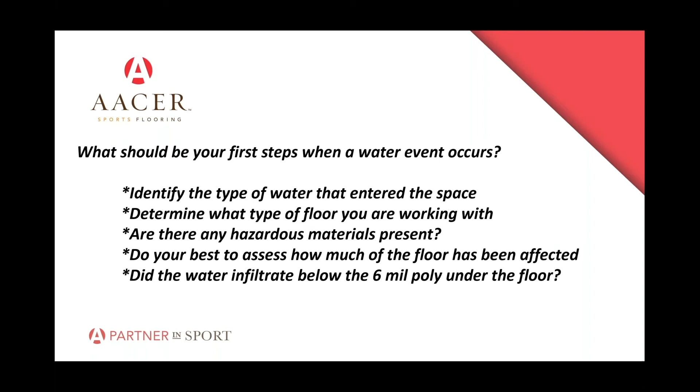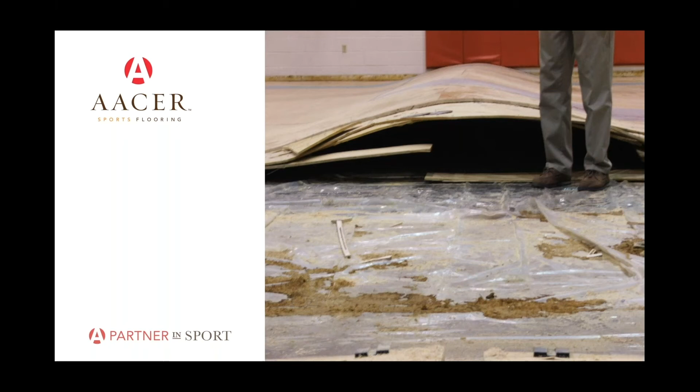Here's another example, and you can see what I was talking about earlier, where you have the visqueen and then the subfloor on top of it, this being a plywood subfloor. You can see it has really swelled and peaked, depending on the extent of how much of the gym was infiltrated. There's been a fair amount removed already. This is just another example of what you might see when you have a water event.

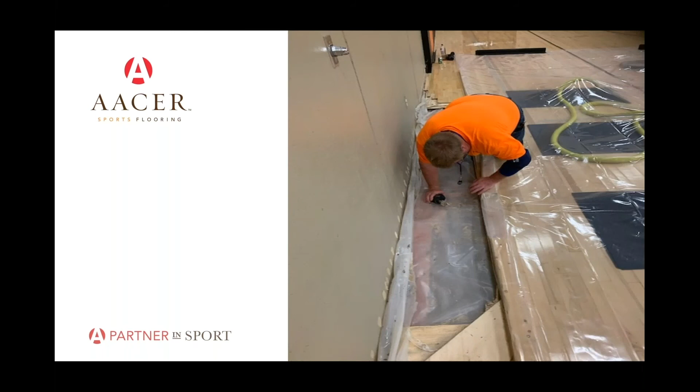As you'll see, or as we'll talk about, they just don't make a lot of this type of material anymore. So you want to get someone in. This is a good picture.

You want to get someone in to start doing an assessment of what's going on. In some cases, like right here, you'll see they've cut back from the wall, probably to relieve some pressure. I don't know if everyone understands this, but when maple expands, like in a minor water event, or even in a high humidity event, let's say your air conditioning system shuts down and it's a real hot, humid day or weekend, your wood is going to expand across the face width of the material more than it will expand across the length of the material.

So most boards are 2¼ inches face width, and as you'll see there, they have cut back from the wall probably about 18 inches. And to the right of the gentleman inspecting that floor, you will see they've already brought in some blower systems that they are looking to use to try to extract the water out from underneath the floor. So this would be a very typical example of a smaller, more manageable water event where we want to open the floor up, we want to get some air moving, and we want to get that moisture out from sitting on top of the visqueen. That's kind of what you're seeing right there.

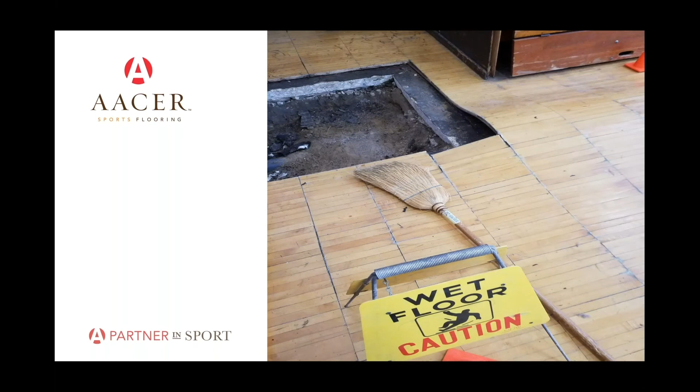The next picture is actually that little cutout we talked about when you're trying to determine what you're dealing with. There again are our short little boards we talked about two pictures ago. And as you can see, there's kind of a black mastic, so to speak, that's underneath that floor. When we talk about making sure you understand what is underneath the wood, that would be this situation where you want to know, you probably want to have it tested with your environmental people.

Maybe most of you have already removed these materials from campus, but these gym floors are old. We're going to talk about the history of gym floors, and really they go back into the 20s and the 30s. This type of system that we're looking at right here would be circa 1950s, 1960s, and we still see a lot of them, quite frankly. So they do still exist, and in most cases, you're going to have some type of an environmental assessment of what you've got going on there. So just wanted to show that.

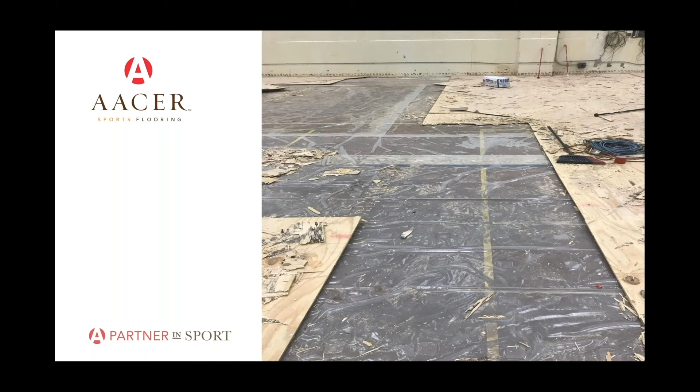So moving forward here, when I talked earlier about what's under a gym floor, I talked about how you always want to know what you're dealing with. You never want to blindly go into tearing a floor out until you know what is underneath it, so you can plan accordingly and be as educated as you possibly can as you go into the process.

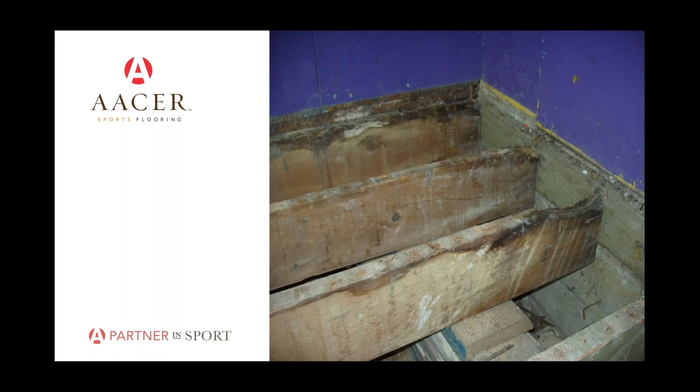So here's a perfect example of a floor that was built basically like a traditional house construction would be built, with large floor joists. There may even be some sort of a mechanical run or a mechanical chase that goes under that gym floor. We've seen that in the past. We've seen construction like this in certain geographies of the United States, and obviously this is a whole different ball game in terms of what you're coming back with. And just an example of why it's important to see what's underneath as you get into the process of what you're going to do coming back with repair/replacement.

And this is something that you should be aware of, using random length maple, it is more time consuming for sure. So it is going to cost a little bit more, but it's going to be a much better repair from a structural perspective, and a much better repair from an aesthetic perspective as well. If you do it this way, and then maybe you sand the whole floor and give it new paint, new seal, new finish, you might not even know that repair ever took place. So just wanted to kind of throw that in there.

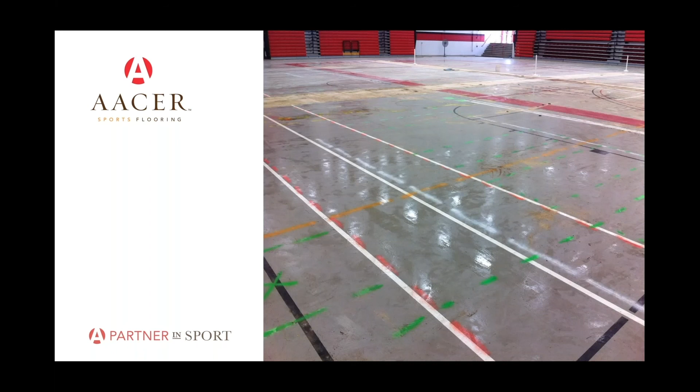These next pictures are from a project where they had an existing synthetic surface and wanted to do a modernization to the facility. And so they came in and they ran some new electric lines. You can see off in the distance, there's some plywood there. I'll give you a close-up of that. There's some plywood there where they ran some new electric lines and some new technology networking lines for scoreboards and such.

And then they filled that space, and then there was a wood floor that was built on top of the existing synthetic floor. And literally within a year of completing that brand new wood floor on the competition area, there was a construction project going on, like for a fitness center, and there was a storm, and a temporary door got knocked loose, and the floor flooded significantly.

So, one of the reasons why I put this out there is because we always want to be aware of if we're having any sort of growth or anything of that nature. And in this case, when we did tear the floor off, we did find that there were some issues with that existing plywood, again, that was only about a year old.

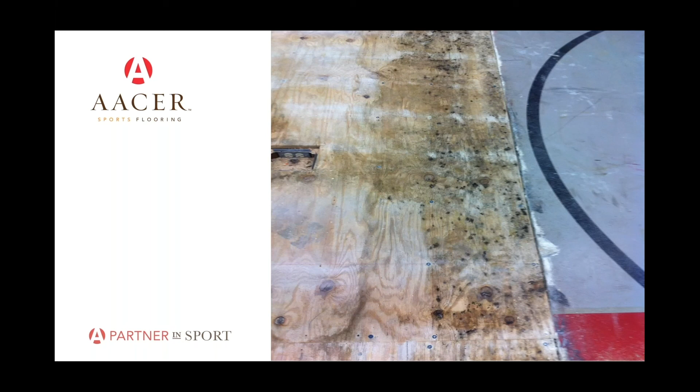So this started out where the original thought was that there was only a small area that was affected by the water infiltration. And I'm going to go back to the first, and as you can see, it was very wet when we got all of the material. So I talked about this earlier. You have to be careful where you think that the water is limited to a small area, because it can be very deceptive, and it's hard for anyone to know where it may or may not have migrated to.

But you always have to be aware of the fact that it can migrate once it gets under the floor, and it will do strange things. And in many cases, it's not as bad as it seems, and in other cases, it's worse than it seems, just depending on the details of the situation. So that kind of brings me through the water event in a facility, and hopefully that's been some good information.

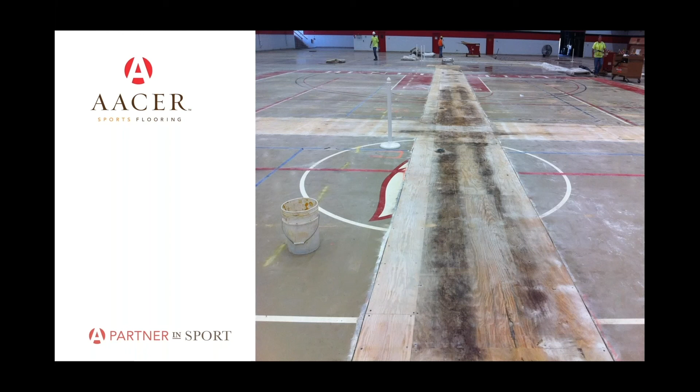And then I wanted to talk a little bit about the history of wood floor designs, because I think it's important. You've seen in these photos that I've presented about water damage, and water damage obviously occurs on old floors as well as new floors. But a lot of the pictures that you've seen would be what we would consider older floor designs. Not all of them, but a lot of them that you just saw, as we talked about with the short little 12-inch boards. That's an older wood floor design.

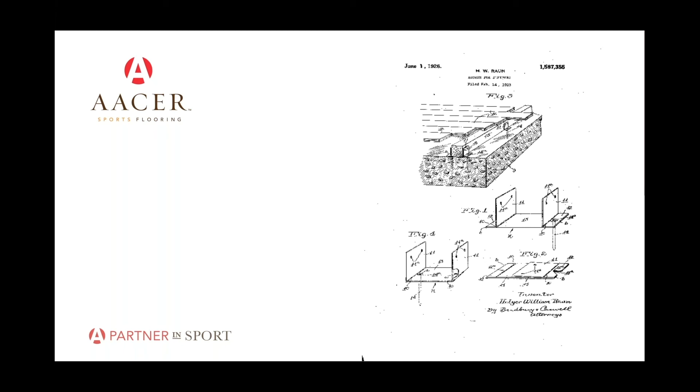This was kind of the first generation of trying to create some shock absorption and resiliency in a wood floor. And again, if we go back and look at this 1926 illustration, there's no shock absorption, there's no resiliency. It was designed for durability and longevity, quite frankly.

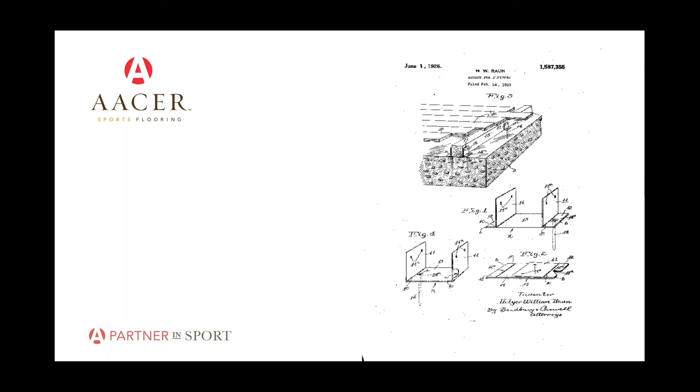So then the next slide that I have is another example of an illustration from a patent application in 1938, where it was a different design of a floor system, where there was a steel channel that was introduced, and then steel clips were inserted into the steel channel and held the maple in place. So you didn't nail the maple in, you inserted a steel clip, and that clip wrapped around the tongue of the material and held it in place.

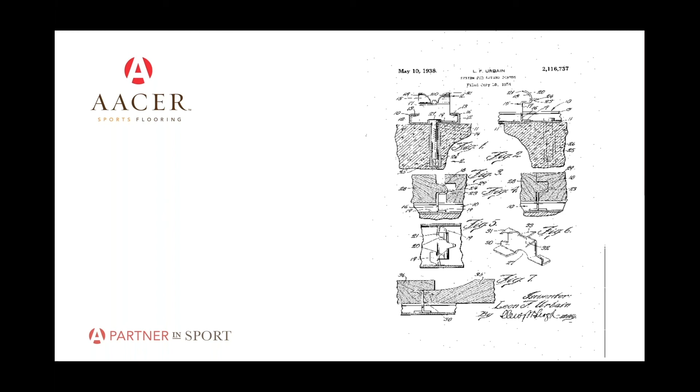So this floor would be something that we still see out there. It's an extremely durable floor. You're going to see this in many high school applications, 50, 60 years old. And I will tell you that from the end user's perspective, it's a hard floor to play on. So your knees, your ankles, your back, you're going to feel that. It's pretty much like playing on concrete. It's a hard floor.

And so moving forward, this is just one more drawing. I don't actually have a date for this one, but it gives you a little bit of an idea of how they started to layer 2x3s and 1x6s into kind of a basket weave fashion, where they were creating the subfloor to have airflow and to have a little bit of resiliency to it. This is giving you an idea of what you might see when you open up a floor. It's an older drawing and an older design, but certainly one that was widely used years ago.

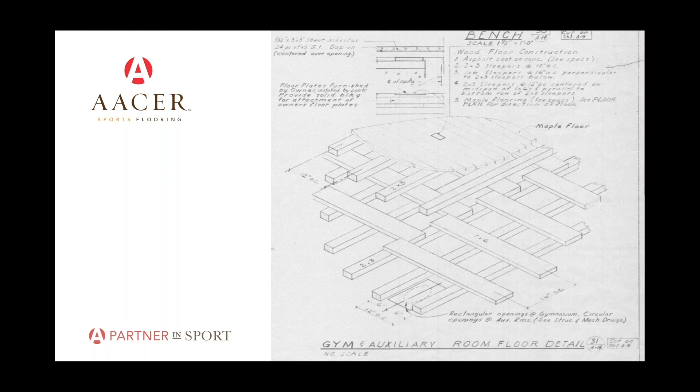So what does that bring us to? It brings us to a concept that we feel real good about, that I'd like to throw out there and talk a little bit about. We've designed what we call a Replay series, and the term replay kind of means what it says. It's taking an old factory floor and repurposing it into a modern floor that provides performance values much better than the original factory floor.

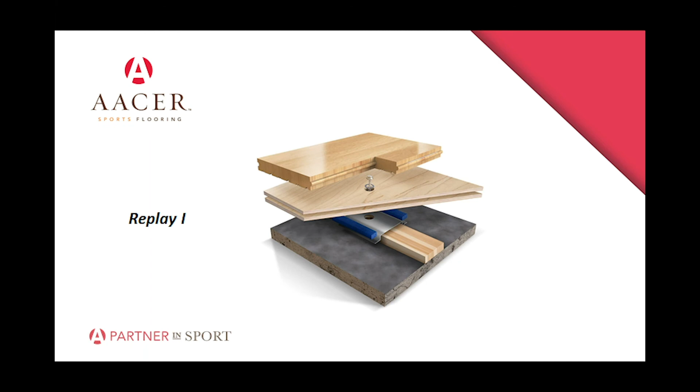And the whole concept here is, with the first two designs, that you're not having to tear out all of the existing floor, you're only having to tear part of it out, and then we're going to retrofit it. And when we retrofit it, it's going to have performance characteristics that in some cases will meet PUR, which is the guidelines that the Maple Flooring Manufacturers Association look to for performance and uniformity rating. So we believe this is somewhat cutting edge, where we're designing floors that are specifically going in to repair and replace a floor.

And so it provides great shock absorption, great resiliency, and it also has a self-blocking mechanism so that if the floor is stressed with, say, a portable basketball goal or a scissor lift to change lights, it will bottom out and it will protect itself from damage in most cases.

Okay, so the third system is called Replay 3, and as we try to illustrate here, it's designed as a self-leveling subfloor system for concrete substrates that are not suitable, that do not have the planarity of 1/8 of an inch in 10 feet for us to install a new floor. And so this would be an option if you were to remove all of the existing floor and then you had a significant planarity issue.

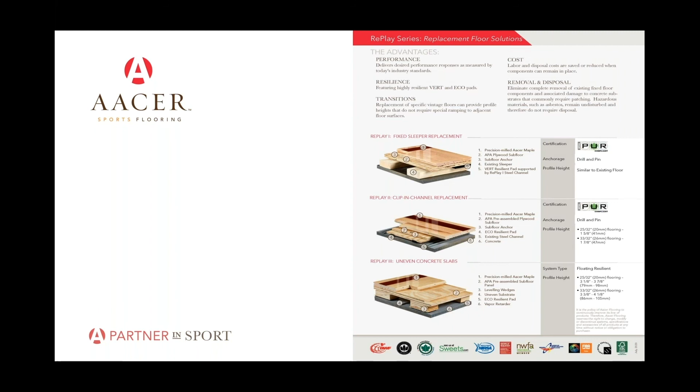And to go back to my shoe analogy, so we had John Wooden shoes, and I showed you some of the older floor systems, and then I showed you ways that we are looking to modernize old floors, give them a facelift with the Replay series. And real quickly here to wrap up, I've got just a couple of quick slides. So we've got LeBron shoes, which obviously are a bit more technologically advanced than John Wooden shoes were back in the day. And we're excited about some new systems that we are currently putting out there. And this one's called Anchored Power Loc LP with VERT.

Vert is a new resilient foam technology that is tremendous for vibration reduction. We're always trying to figure out how to reduce vibration in these floors, and it's tremendous with shock absorption and resiliency. It's antibacterial, antimicrobial. It is widely used in a lot of athletic applications that are not floor related, as a source of resiliency, shock absorption, in some cases body protection for athletes. So widely used, and we're excited to incorporate it into these systems.

As you can see, there's a notch in that sleeper. So we're basically taking two different types of subfloor technology with a plywood sleeper. We're notching it out, and then we're using 1x6s as the second layer of material. We're anchoring this floor to the concrete substrate. And again, it's allowing us to give a floor that provides shock absorption and resiliency. It meets PUR, but it also will bottom out when that little housing, that little cutout is maxed and the floor is flexed. It will protect itself from being over flexed by a portable or a scissor lift or loaded bleachers or any of those types of products. So that's one of our new systems that we're excited about.

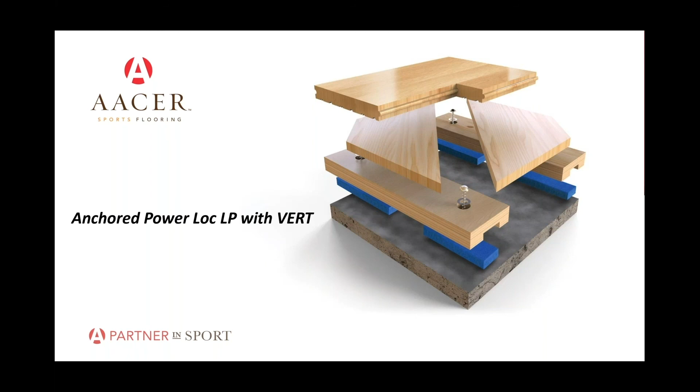Just kind of for the record, for these drawings, I do show the Vert material in blue and green, but when we actually install them, the material's in black because, well, it's going to be covered up for all of eternity, hopefully, and we don't see the need to color the material when it's going to be covered up and no one's ever going to see it. But we're really excited about the Vert product, and certainly we still have all of our existing systems as well. So looking forward to getting this introduced and talking to folks about it.